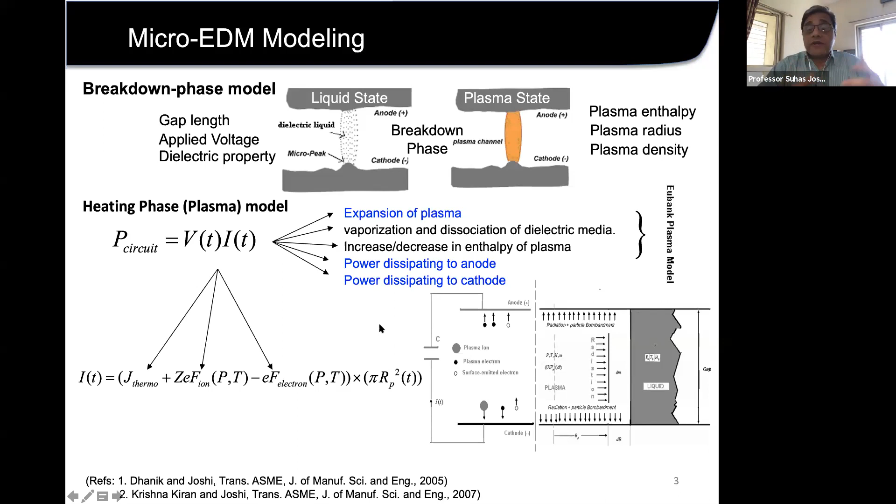So we found that there are certain small differences in the sharing of energy between the anode and cathode, and the power going to the anode versus the cathode. Then we re-evaluated the energy required for generation of the spark.

So these are some of the times in microseconds showing how the plasma is actually forming between the anode and cathode in micro EDM. These were calculated values, but later on Professor Kunieda from Japan actually used these calculated values to verify his experimental values.

He was able to generate a single spark and actually measure the size of the plasma column. We found that our model and the experiments agree well when the total spark energies are lower, but when the spark energies are very high, our model was giving larger results than the experimental results.

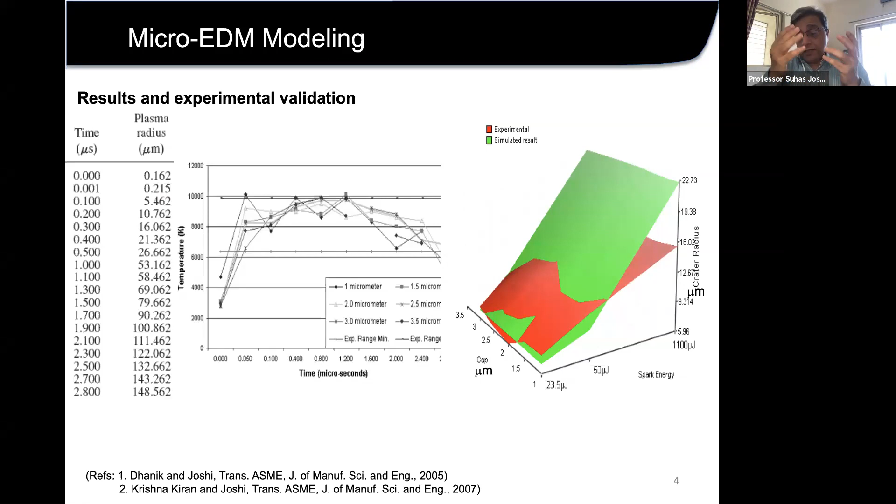That was because we had not considered resolidification of the evaporated material. When the spark forms and a cavity is formed in EDM, after a while there is a certain amount of resolidification of the metallic wafers, and the actual dimension of the crater formed is smaller than what it initially was. So that's where, at larger energies, those differences become much larger.

Similarly, at that time there was no understanding of how deep a hole can be made in the EDM process, and what the shape of the hole is. So we devised a method - I don't say it's a great method, but here's what we did.

We had two very polished surfaces, and we joined those surfaces together firmly. Then we actually made these EDM micro holes in between the two surfaces, which were held together by some kind of vise.

You can see here these are the two surfaces, and this is a very small electrode, about 400 micrometers. We actually machined at the interface of the two surfaces so that you can open them and see how the holes are actually machined.

So that is what you can see - these are the surfaces opened like this. The holes are made like this, and the surfaces are opened and kept like this. This is the top half of the hole, and this is the lower half. So we did a lot of experiments, almost like 20.

This was according to an orthogonal array, about 27 experiments, and in all of them you can see that they are exactly at the center, so the shape of one half is exactly equal to the shape of the other half. We found that a huge length to diameter ratio is possible - about 10 is easily achievable in the micro EDM process.

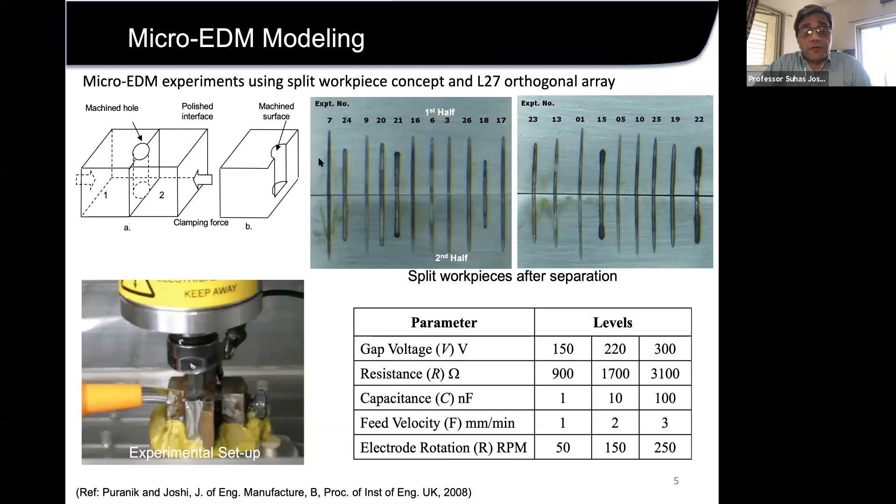Some of the holes which we opened - now we have access to the holes that were machined, and we can do a lot of things. We can do scanning electron microscopy on the surfaces and see what happens.

You can see the entry of the hole here, and this is the end of the hole. The initial hole is very fine, but as you go down you find there are a lot of particles or debris sticking to the surfaces, starting from here to here. This is a further enlarged view.

You can see there is a very nicely dimpled structure on the surfaces, meaning the EDM process is really happening well. But when you go down towards the tip, you find a completely botched up surface, in the sense that sparking and resparking happens repeatedly on this.

This is a very close view of the surface at the entry of the hole. You can see the EDM cavities, or craters, which are actually formed on the surfaces. But towards the middle and end, you find these surfaces get eroded because the debris particles cannot come out from the process - since the hole is very small, debris ejection becomes very difficult.

These particles, when they try to come out, actually get trapped between the electrode and the surface, and they generate different sparks at different places. Yes, we get secondary eroded surfaces, but that secondary erosion is very prominent at the ends of the electrode. Now, towards the tip of the electrode, these debris particles actually eat away the electrode itself because of the sparking process.

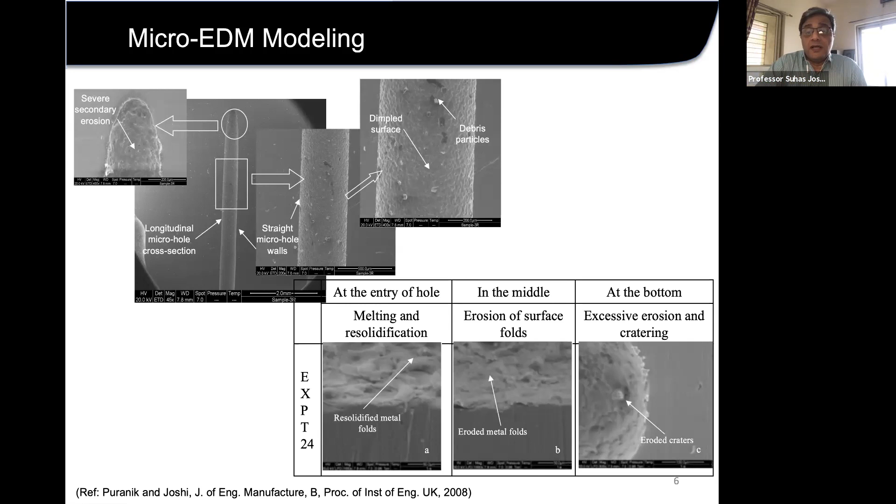We also did a lot of microstructural understanding, like measurement of micro hardnesses in the lateral directions along these holes. We also checked the compositions at various places.

The conclusion is that the hole surfaces are fairly less damaged, I would say. This schematic actually tells you what exactly it is.

If you take a regular EDM process, you will find there is a damaged zone from this point to this point. You have a hard layer, then a soft layer, and then the bulk material. So you have an excessively damaged surface in the EDM process.

But in case of the micro EDM process, we hardly found any kind of white layer. We found just a small reduction in the hardness near the hole wall. So if this is the wall of the hole, there is a small reduction in hardness.

We took machining parameters which required each hole's machining time to be very large, and that was sometimes criticized—people said, okay, you used more time, so you got no white layers, and we got only a small annealed zone around the holes.

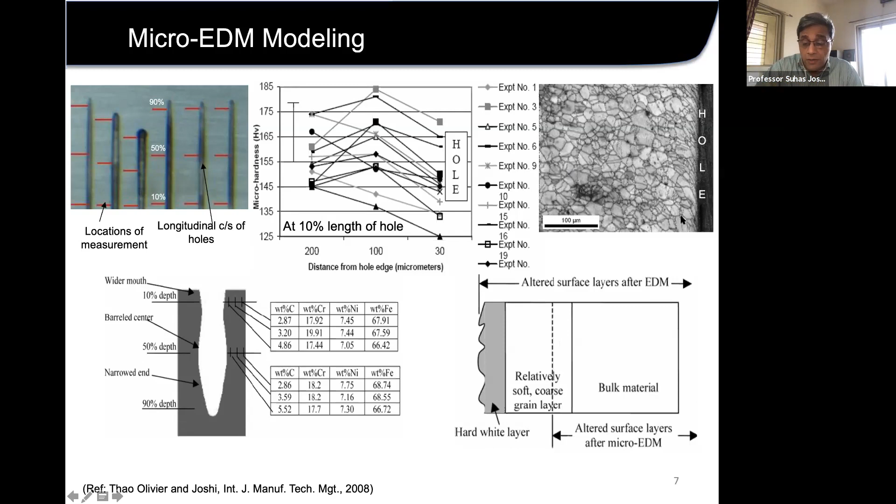During this experimentation, by then we had those small machines for performing EDM operations. We also went on to do modeling of the wire EDM process. So now, instead of a single spark, we modeled a series of sparks around a wire. If that happens, what is the material removal rate, and so on and so forth.

So this is the model of the wire EDM process, and it was also published in one of the early journals at that time.

One important aspect here is how you graduate from a single spark model. We initially had a single spark model which talks about only a single cavity. How do you take those cavities and multiply them on the surface? When you multiply it, is every spark having equal energy? Where is every spark going to be positioned? What is the spatial distribution of the sparks? All those things come into picture. So from single spark to multi-spark, it's a big process.

Even now, last month, one of my students finished a PhD in EDM, and he developed a model of multi-sparks happening on the surfaces at random time durations and at locations where the interelectrode gaps are smaller.

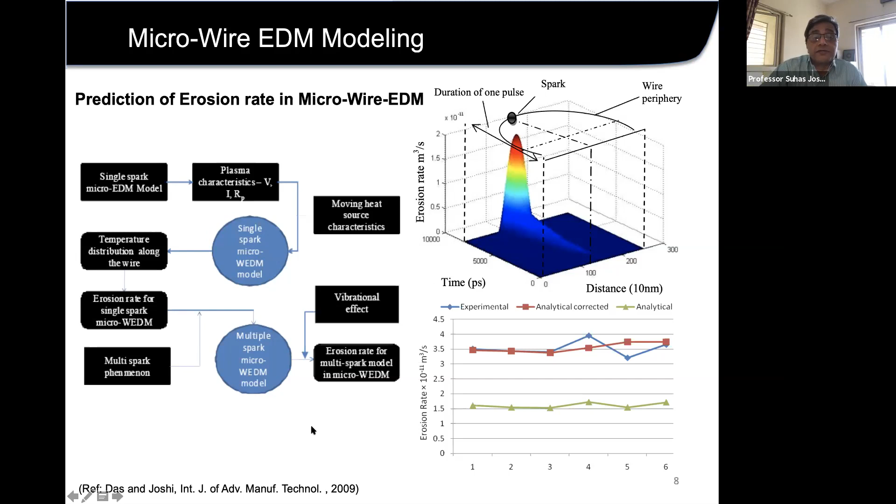At that time, another important process being considered for micro machining was micro electrochemical grinding. This is also a very interesting process, and primarily it is used for very fine applications like dental implants.

The process is something like this: there is a grinding wheel, which is a conducting kind of grinding wheel, and there is electrolyte flow which generates a hydroxide layer on the surface. This is an insulating kind of layer, and the abrasive particles actually abrade that insulating layer during the grinding process and expose the new surface to the flow of electrolytes so that the electrolysis process can happen.

We also find that in this process, the gap being very small and the flow velocities of the surfaces being very large, some kind of turbulence is created, which generates a layer on the surfaces and basically generates shearing stresses on the surface. This helps remove the oxide hydroxide layer formed and expose the new surface.

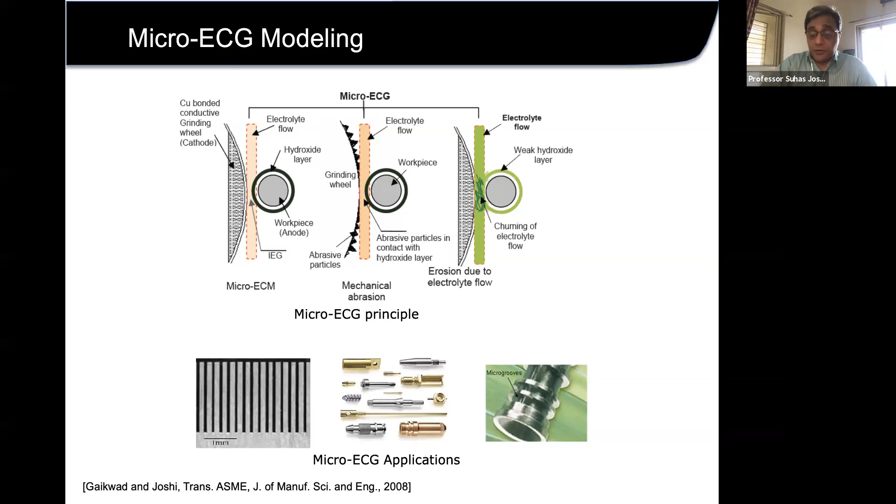So we ended up developing a small setup. This is a grinding wheel enclosed inside, and this is a workpiece with a small projection. You can see the grinding wheel here, and there's a small rectangular cavity through which you can pass the work surface, and then the grinding will happen. Because this electrolyte is corrosive, it's very difficult to manage - otherwise the entire setup will get corroded. This is an interesting process where, using this, we could develop small grooves on the surfaces.

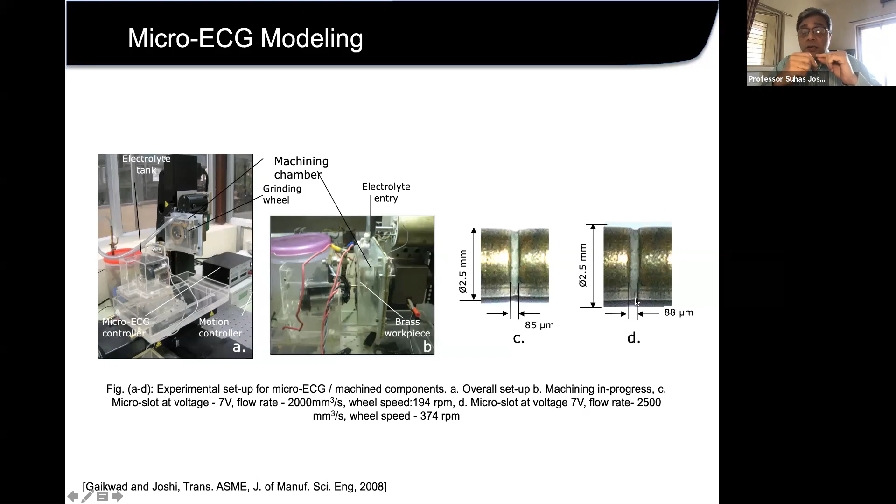At the same time, we modeled the very small interelectrode gap - what happens in this gap, what are the velocities at the two boundaries, and how much stress these boundaries apply on the surfaces. So this was another effort which we did.

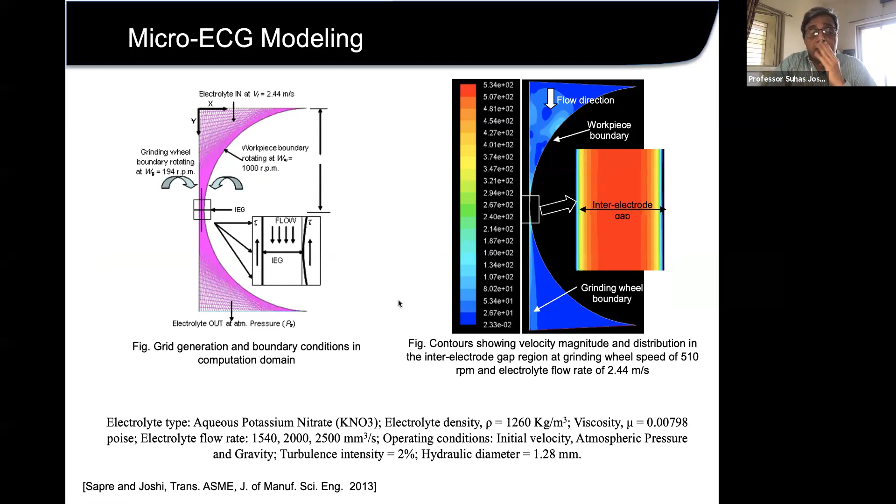You can see this is velocity versus distance across the interelectrode gap. The velocities are higher towards the wheel, and on the workpiece side also the velocities are higher, creating shearing stresses. This is the magnitude of the shearing stresses, which is maximum at 90 degrees.

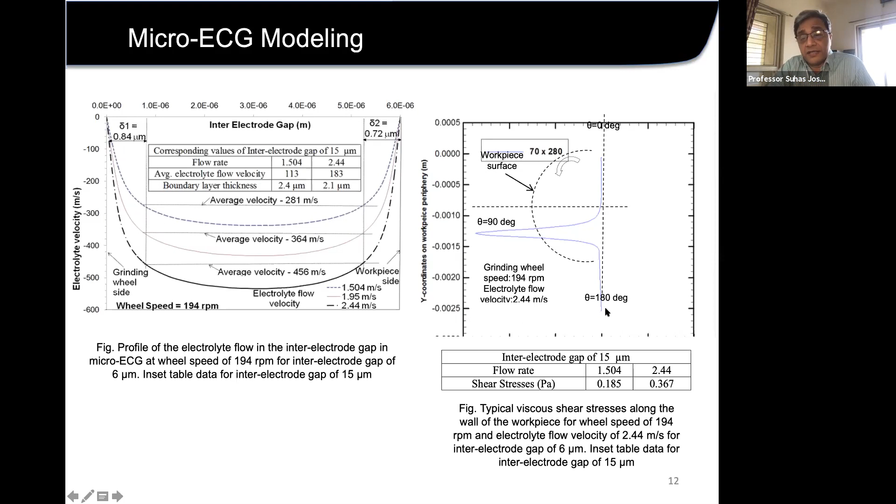Another thing we did was, at that time very small mini dynamometers came into the market. They were very costly, but we were fortunate to be able to buy them through some funding. We tried to measure the forces coming on during the grinding process, and calculate the shearing forces through the measured shear stresses applied in this region and the downward forces measured using the dynamometers. We got a reasonable approval, but not that accurate - though the forces and shearing stresses came out in a similar range.

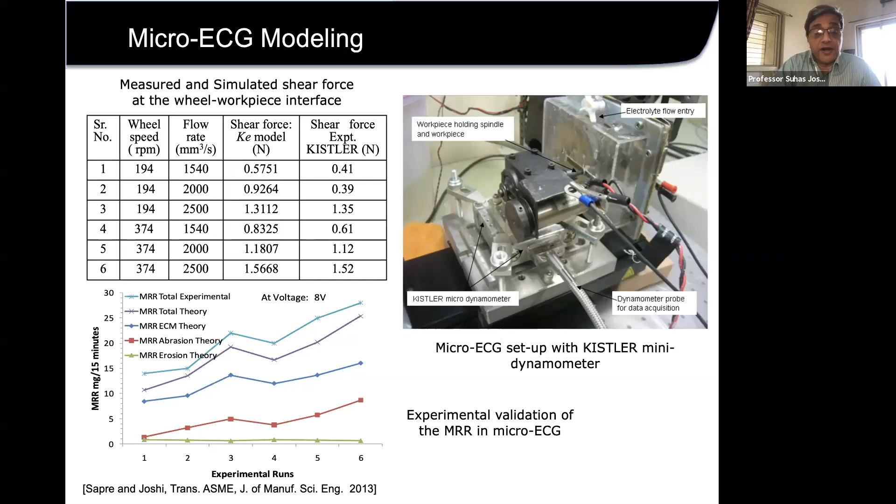Similarly, apart from these processes, micro laser was becoming another important tool at that time. Some students were working on laser manufacturing also. We had a laser system available - I'm not sure whether this will work, but it may work.

What it does is we focus the laser on a mask, and the mask has all kinds of holes, whatever we want, and the beam passes through the mask. Now the laser beam has several small beams. The image of the beam can be reduced in size, and after reducing in size, it can be incident on a workpiece surface.

So now I can have a mask with 100 holes, and the mask can be larger, but those 100 holes' image can now be reduced. And then I can put it on a surface - this is one image. At that point, I do some pulsing, then go to the next stage, somewhere here, or here, in a 3 to 4 millimeter space. It's a very small space because I can now reduce the image, make it very small. If I have 100 micron holes on the mask, I can make those holes 25 micron, or 15 micrometers, if I have a 1/5 or 1/8 or 1/4 reduction in the optical reduction. And then your mask making becomes simpler because I can make the mask bigger, and reduce the image of the mask to a smaller extent.

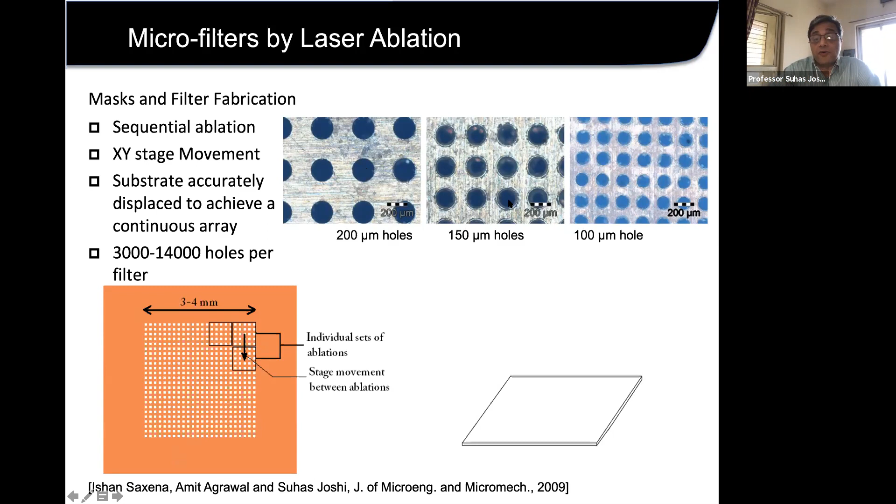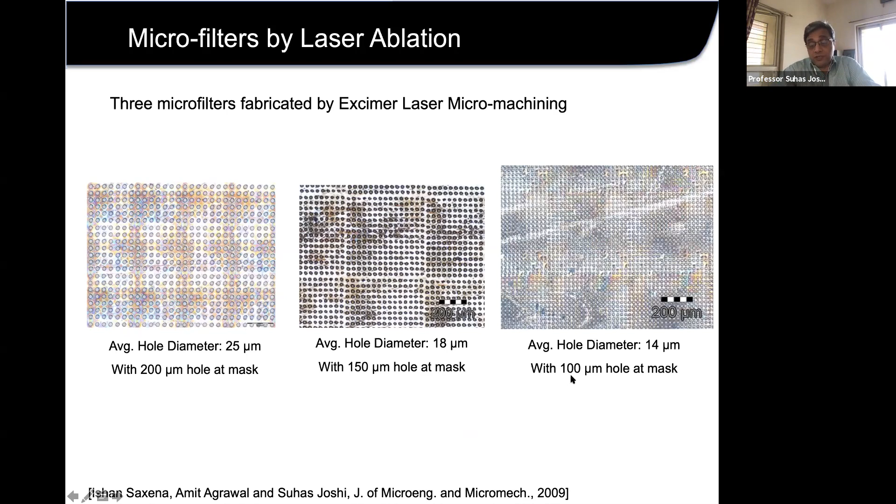And so now I can take this, go to one position, move the table, and perforate the whole surface. It was again a very tedious process, but we could make the mask with 200 micrometer holes, 150 micrometers, and 100 micrometers, and then we could actually make the polymeric surfaces, what we call the filters, microfilters, with some kind of spacing - 25 micrometers, 18 micrometers, and 14 micrometers. So very, very small. A 14 micrometer hole is very small, and we could make it using a 100 micrometer mask because that reduction in the beams was possible. So you can see that even 25 micrometer holes are fairly small, fairly uniform in size. So the smallest holes we could make here.

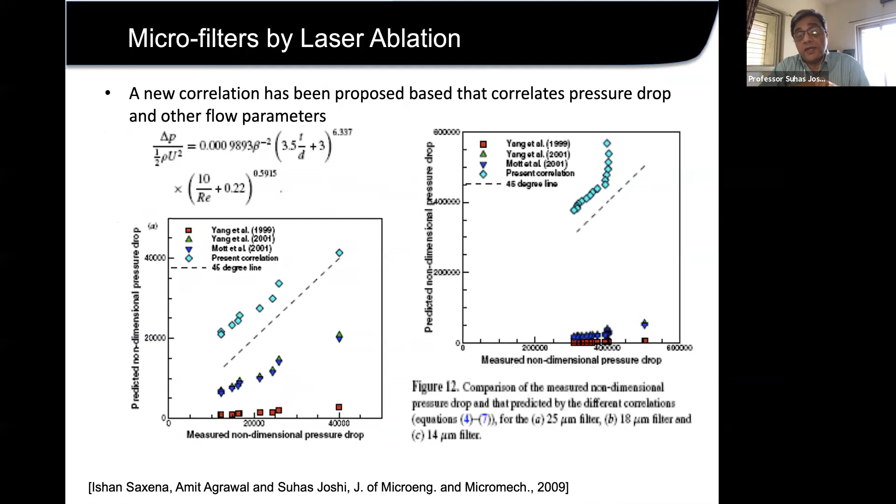And then we could make, with the help of this, it can be put into a device, and you can measure the pressure drop across the microfilters. One of my colleagues, Amit Agrawal, was involved from that point of view in this particular work. And we had certain results - what is the pressure drop across the microfilters - and we could get fairly reasonable results at that point. Okay, I think I dropped a slide, but fine. So we could get some kind of reasonable estimate of the pressure drop across such filters.

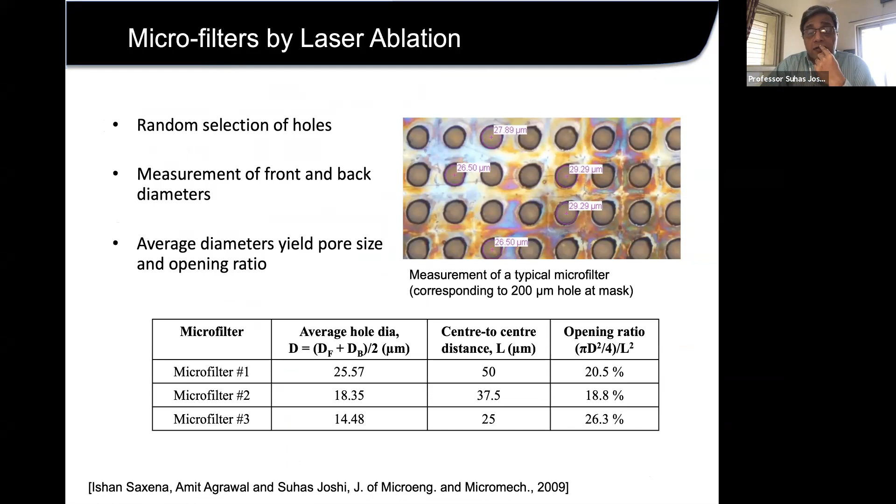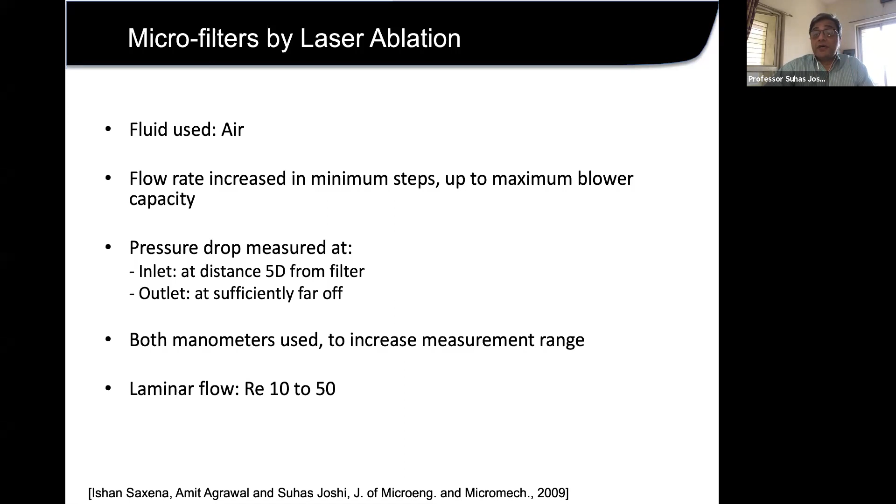But we could make - I'm not able to get the exact number - I think 16,000 holes were made in a 3 to 4 mm size. We made about 16,000 holes in that small size using the lasers. So of course it was a polymeric plate.

Also, similarly, the efforts at that time were towards helping hold micro objects. So can we have some micro grippers to hold the micro objects? And that's where another dimension, another set of people, were working on how do we design micro grippers which can give you very small force, applying very small force on micro components, so that the components do not break.

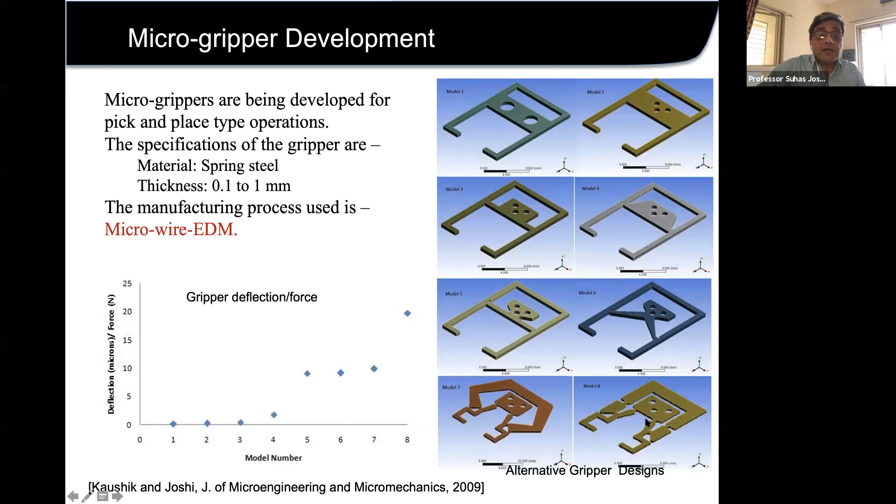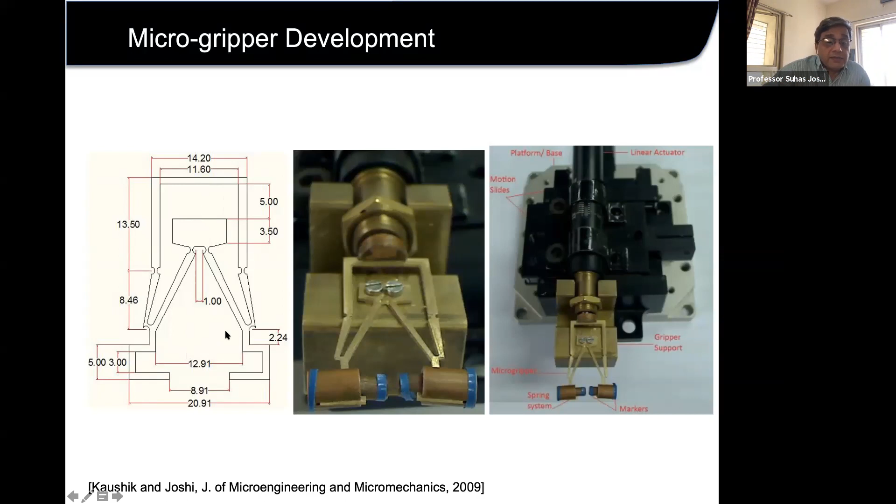So after a lot of iterations, we have these kinds of joints, and we designed this kind of a gripper - a planar gripper. This was actually something like this: if you apply a force here, then these grippers close. So if you apply a force from the backward end, the grippers actually close. Though this looks like a very elementary structure, it's very interesting, because this whole gripper was manufactured, and then these two pipes were introduced - these pipes are nothing but like small cardboard pipes. The whole gripper is not more than 50 millimeters by 20 millimeters. So it's even smaller than that - I'm kind of forgetting, but yeah, even smaller than that.

So the interesting result is here: the two concentric cylinders, one has a spring inside. So what we can do now is that when the jaws come inside, they only apply a force enough for holding that particular object - suppose you have a hair, or nail, or a simple glass plate in it - and only that much force is applied. It doesn't apply more force, because now you have a spring between the two concentric cylinders, and that spring is pre-calibrated. So these blue dots are nothing but the markers - these are bands which can be visible from the top camera. And now you can see the displacement of the springs and calculate the force it is applying to hold a hair, a thread, a nail, or a glass plate.

You can see now that the force required for holding is 43 millinewton, 62, 102, and 159 kind of. So it applies only the force which is required for that particular object and not more than that.

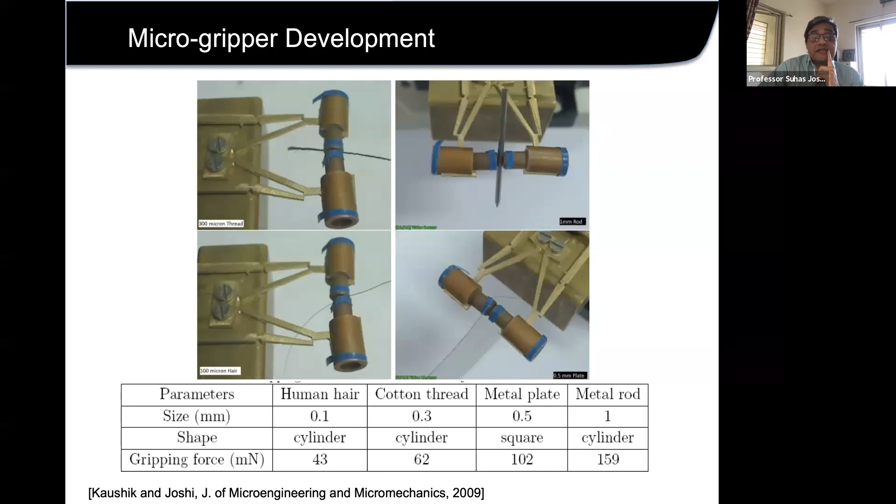Parallelly, we were also doing a lot of collaboration with Bhabha Atomic Research Center, and a lot of components we were manufacturing, that was going on up to 2015 or so.

These are some of the components, like this nano delivery pin, where a 40 micrometer slot is carved inside a pin, so that when the pin goes into DNA liquid, by capillary action it absorbs a small amount of liquid. And when it touches the nascent surface, it releases a small fraction of that, a nanoliter or so.

There are many ways by which we actually fabricated these pins. These are micro exchanger plates, actually 100 micrometer thick foil. Out of that, 40 micrometers we removed, and 60 micrometer we removed, and kept 40 micrometer over there, so that these act as coolant passages.

So these grooves, though they look pretty dirty, are like 60 micrometer deep, and a small cutter was actually designed to make these grooves, a peripheral milling cutter.

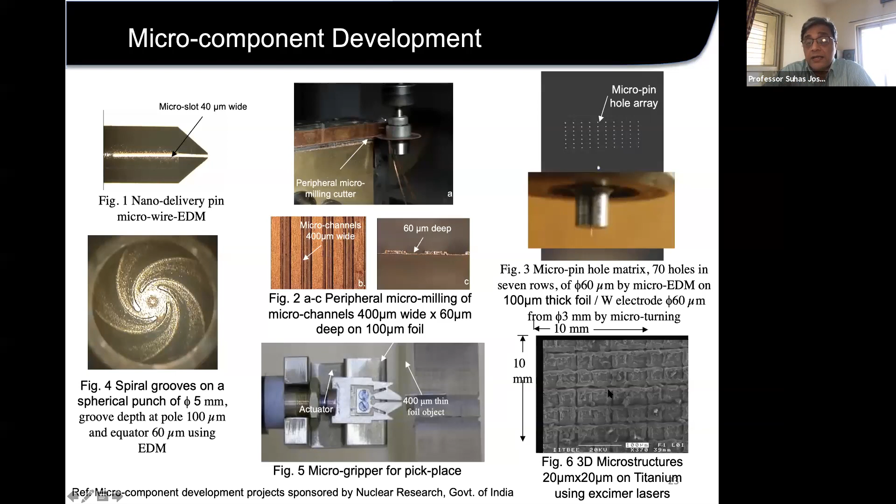These are very fine kind of grooves made by the EDM process to give a differential pressure. These are spiral grooves, and when they rotate, they create a differential pressure across these grooves. These are some of the initial textured surfaces made by lasers, but we did a lot of things later on.

So from here, we have been doing different work, but this is some textured surface manufacturing using EDM, using micro machining processes.

These are some textures which are there on the wings of cicada, like sharp peaks on the surfaces. When bacteria fall on it, the bacteria actually pierce on them and die. Whereas here, these are globular kind of structures, multi-scale structures, like smaller globules but larger globules at the bottom, and smaller ones on the hairs on top of it, like multi-scale structures.

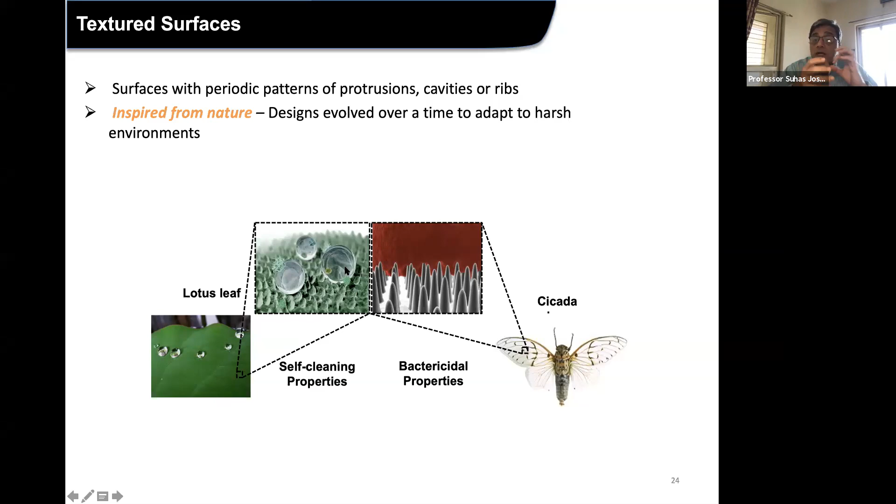Which are good for self-cleaning kind of properties.

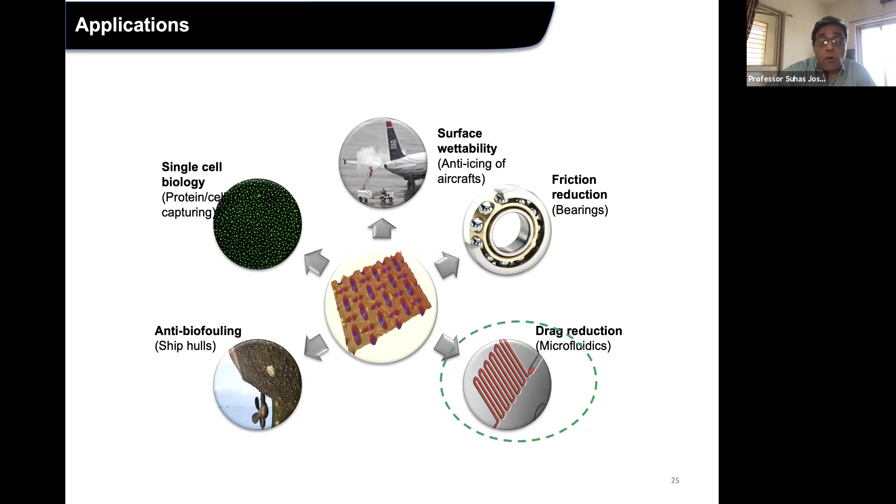Variety of structures are required for variety of places, in bearing industries, drag reduction, anti-fouling, protein biology, or anti-icing on the wings of aircraft. So some kind of structures are required such that ice flakes do not stick to the surfaces of the wings and just fly off from their positions. Otherwise, the ice falling on the wings of a parked aircraft causes a lot of increase in load. So these are some of the examples.

Going in that particular direction, we have developed another process which is called reverse micro-EDM. What is done here is that, we know in the EDM process, we actually use electrodes and make holes on the surfaces. But in reverse EDM, what we do is we take a plain electrode, a plain workpiece, and take an electrode which has holes, and we try to penetrate the electrode inside the workpiece.

So you can get these kinds of projections on this. This is a simple perforated plate which is having some holes. Now no EDM action occurs on this side; EDM action only occurs here, here, and these corners. So after some time, you can make these kinds of rods on it. We were initially thrilled to get such kind of very fine rods.

But later on, we did some organized experiments and we found that yes, rods of various sizes can be made, and if the holes can be of any shape, you can have the rods of that particular shape.

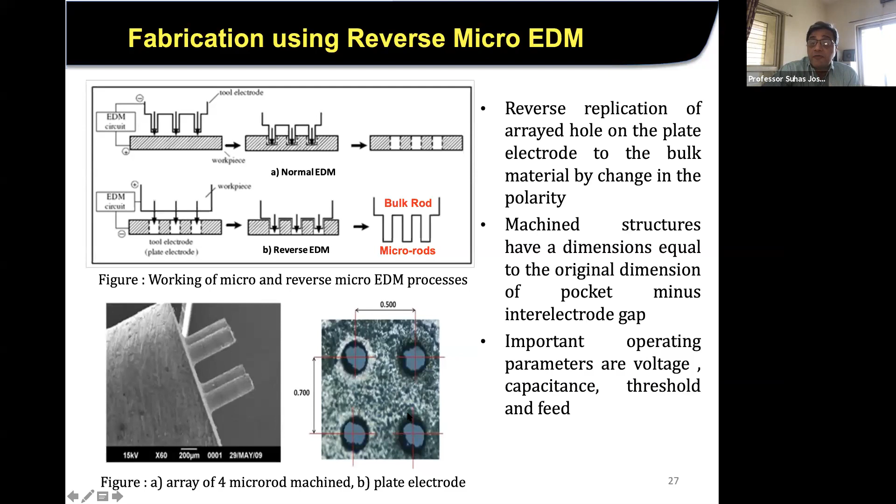After the initial experimental setup, we did another addition here. We found that during the electrode up and down process, the debris which accumulates around the holes sticks to the rods and keeps eroding them.

So the rods formed in softer metals are not very straight, and have a lot of constrictions and uneven surfaces. So we came up with the idea of providing some vibration motion to the table itself, so these debris particles get away from the whole process.

The situation is something like this, with these holes being very, very small. What we did is put an electromagnetic actuator at the bottom of the table itself, and gave very low frequency vibrations to the table, which has helped release the debris particles getting entrapped between the holes.

And now we could make very long rods, without much wear on the electrode also. Sometimes what happens is that the electrode holes get worn out and become larger, so that's another problem.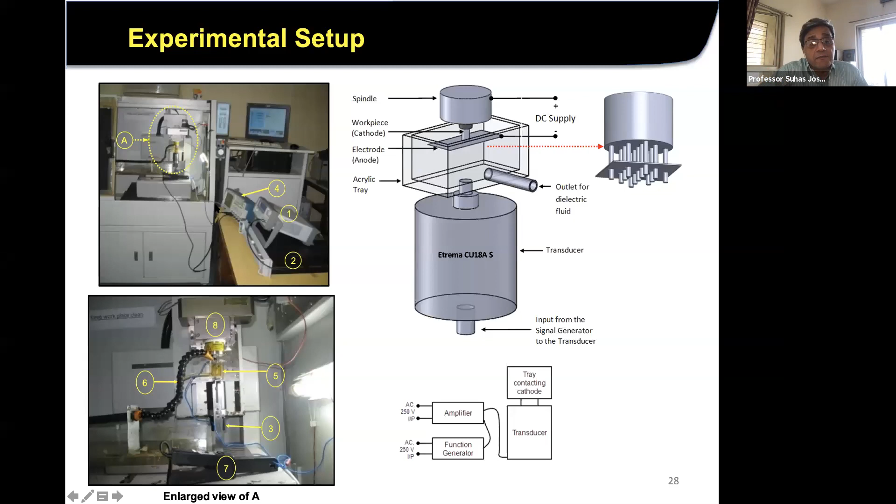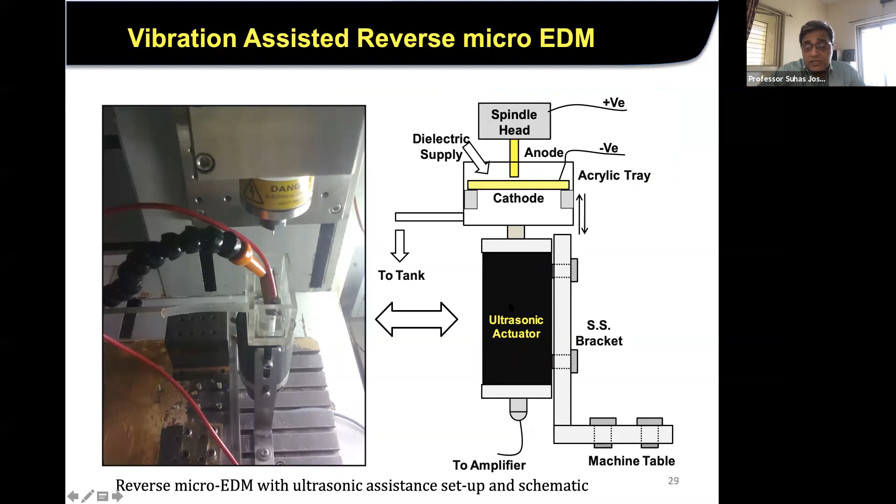This is another experimental setup done by my PhD student, for making rods of very large sizes. You can see here an ultrasonic actuator, but actually these frequencies are lower, and with the help of this actuator we could make a lot of difference in creating a variety of structures.

For example, this is an 8 millimeter diameter titanium rod, and you can see these kinds of structures formed from here to here. Of course these are orderly structures, but the process has a lot of capabilities.

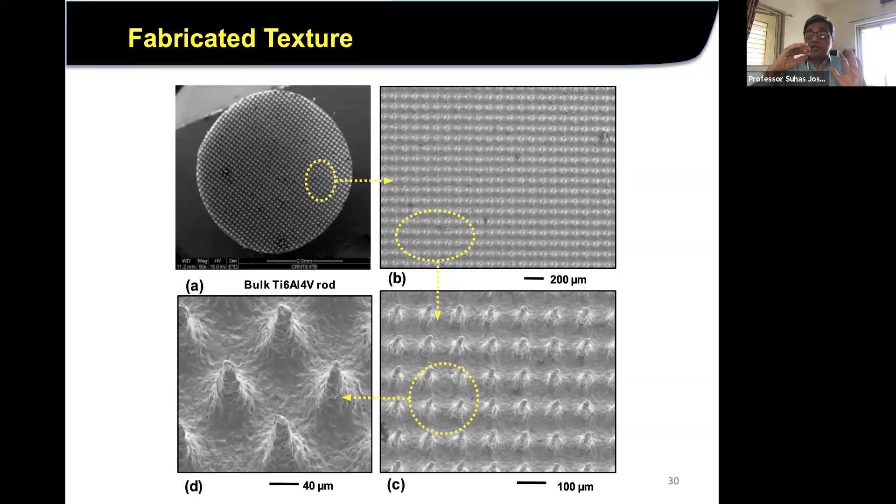We have later explored it for uneven surfaces and very flexible electrodes. As long as they don't contact the surfaces and short circuit, this process can work. We could get this rod which has these kinds of projections.

The pillar heights are about 170 microns, width 25 microns, and gap between them 75 microns, so they are fairly close together. Of course, this depends on how well you can make the holes in the electrode itself.

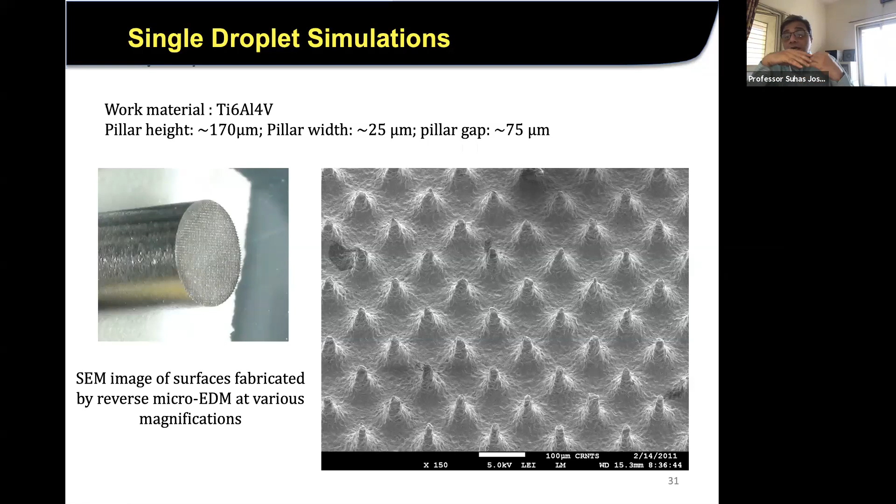So we did contact angle measurement here. On a flat surface, the droplet flies off and is flat, whereas on this surface, the droplet sits with a high contact angle of about 114 degrees, compared to 52 on the flat surface.

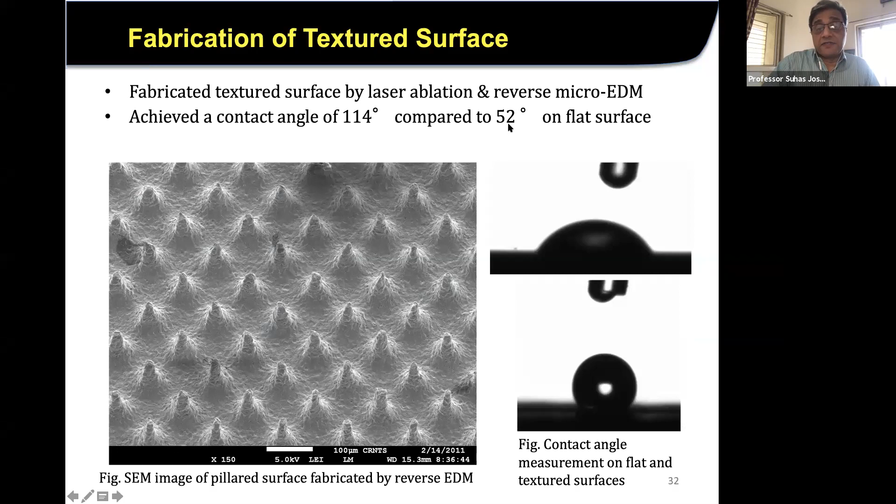This is again another exploration - the first one was where somebody wanted to know if this could be done by laser. This is the enlarged view of laser - one line of laser, and this is another line of laser, and this is the pillar which is formed.

Each pillar formed here is nothing but these - these are the pillars, and you have laser lines from one side to the other. These are very early experiments, but these globules of material on the pillars were actually helpful.

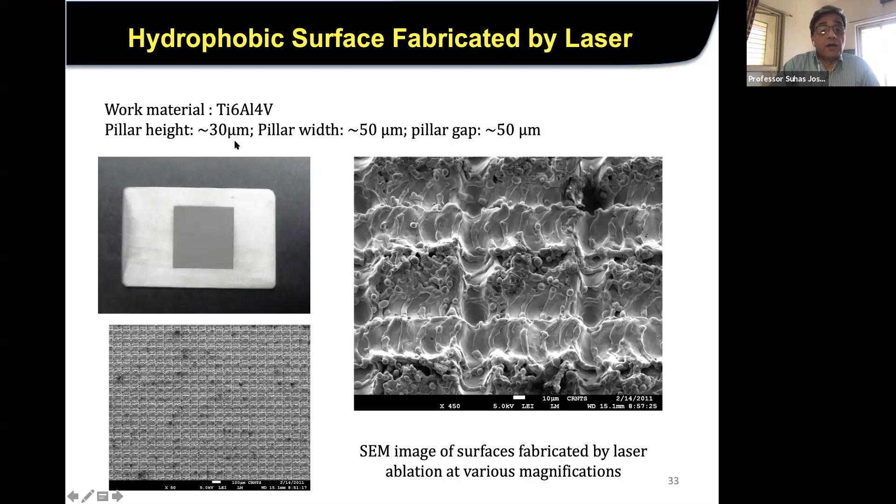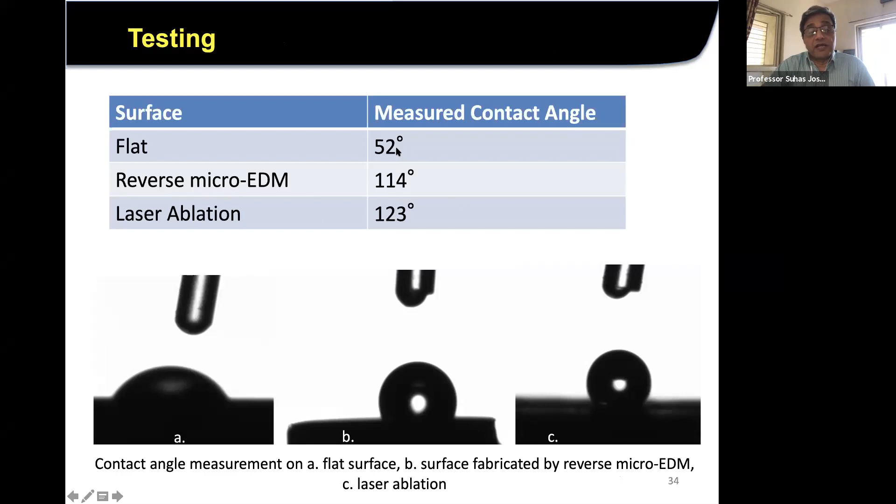The contact angle was 123 degrees here in case of the laser surface. In the EDM surface it is 114, and on the flat surface it is 52 degrees.

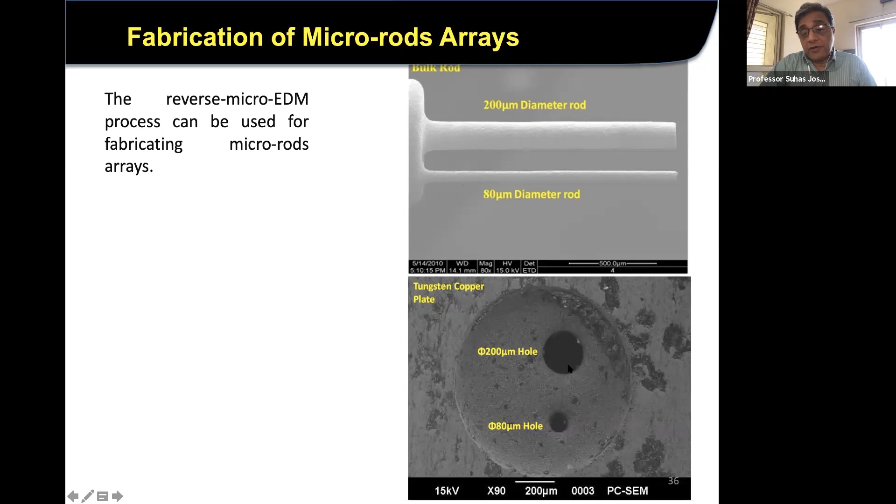So then again, we continued and tried to explore the longest lengths and straight dimensions we could make using the EDM process. These are some of the fine rods we could get on this tungsten copper plate - 80 micrometer and 200 micrometer, very high aspect ratio structures.

These are again some examples of very high aspect ratio structures. The smallest rod we could get is using a 25 micrometer size hole, giving about 744 micrometer length, so it's a very high aspect ratio.

But you can see that the rods behind don't survive the whole process - only one of the 4 rods actually survived. Because, as I said, small debris particles actually eat away the work material itself.

This is another example of using lithography for etching, where we made 4 different kinds of textures in 4 different quadrants of a silicon wafer, and then put PDMS on it so fluid can pass on one side and be taken out on the other, with the structures at the bottom of these microchannels. This sample shows microchannels built at various places on a silicon wafer, with inlet and outlet tubes.

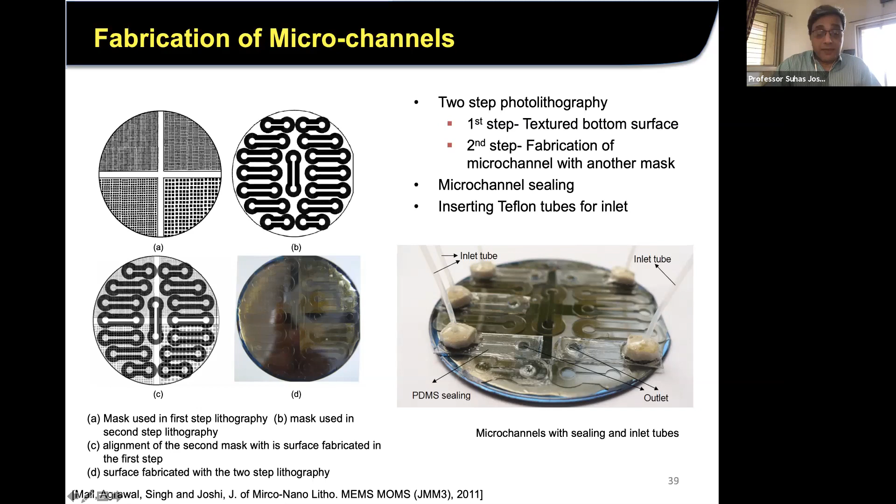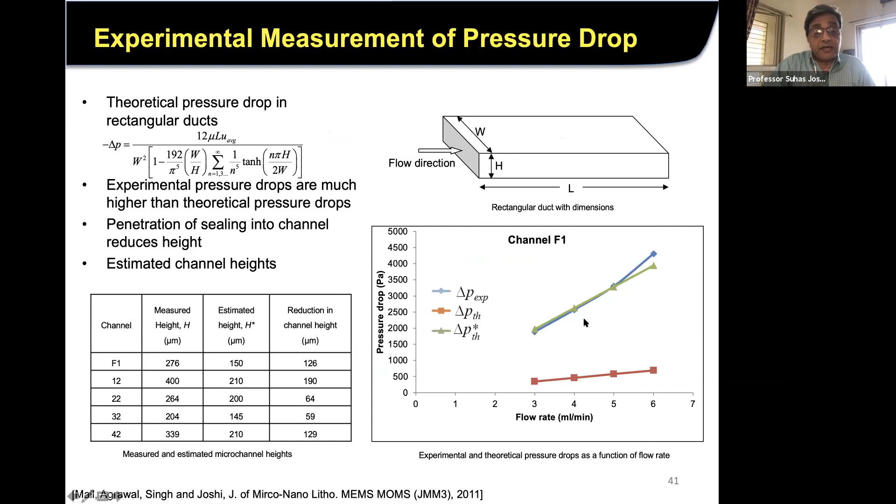This is the experimental setup. Again, my good friend Professor Amit Agrawal is part of this work, whenever fluidics comes into picture. We measured the pressure drops and got reasonable agreement with the measurements. This work became a cover page article in the Journal of Micro Nano Lithography, MEMS and MOMS.

More recently, we have been working on texturing of cutting tools. These are diagrams of the textures made - dimple-like textures and grooves on the surfaces. During the cutting operation, when the chip flows on the face of the tool, there are two different zones: sticking and sliding, with very different pressure and velocity conditions, so you cannot use a single kind of texture in both zones. We experimented with different textures - longer grooves in the sticking zone on the tool, and dimples in the sliding zone.

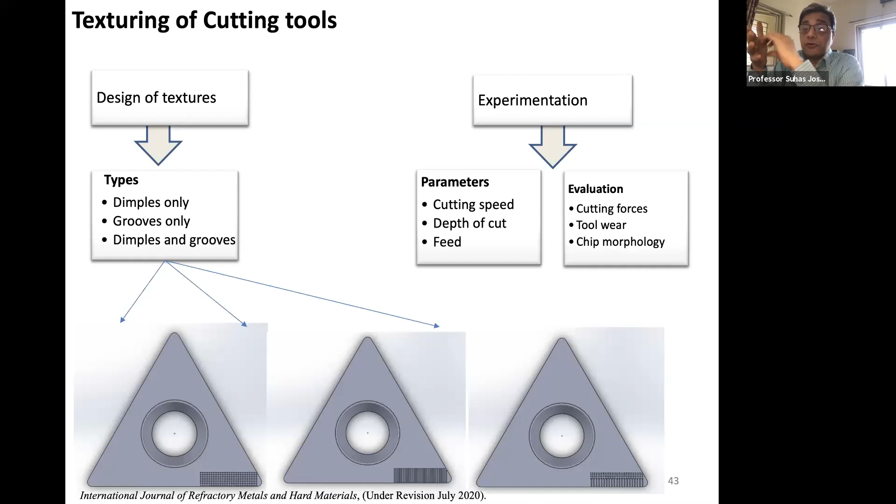Am I audible, or did I get momentarily disconnected? Yes sir, yes sir, no we can hear you. I'm audible, right? Yeah, now we are, no problem, we can hear you. Because I think Suhas, no problem. Okay, so I'll continue.

The chips also show a very interesting pattern when we use textured surfaces. Initially we had heavy segmentations under very high feeds, and those heavy segmentations reduce significantly, to some extent becoming sort of a continuous kind of chip. These are the back surfaces and these are the side surfaces of the chips. The back surface is very...

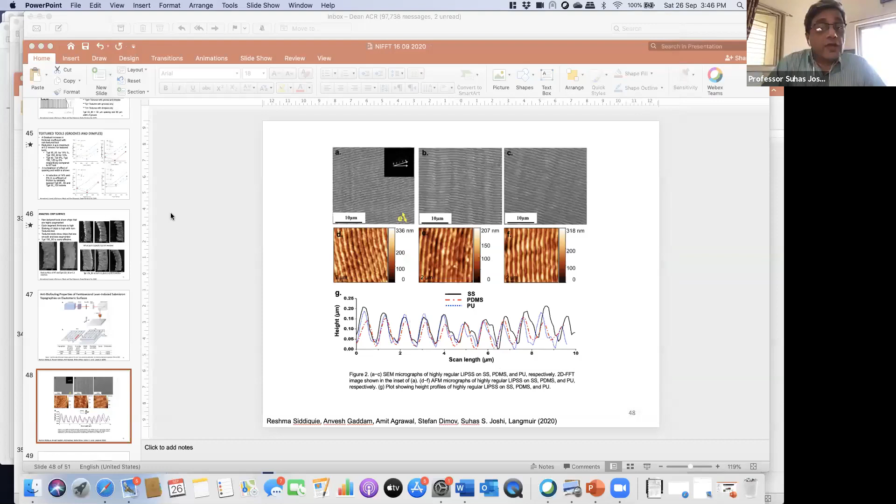We are able to view your slides. Are you sharing the slides? Yes, I am sharing the slides. Okay, maybe because of disconnection, I'll do that once more. Okay, sharing screen has gone, I think. Yes sir, it is clear now. Okay fine, I think from here we lost the connection, I believe.

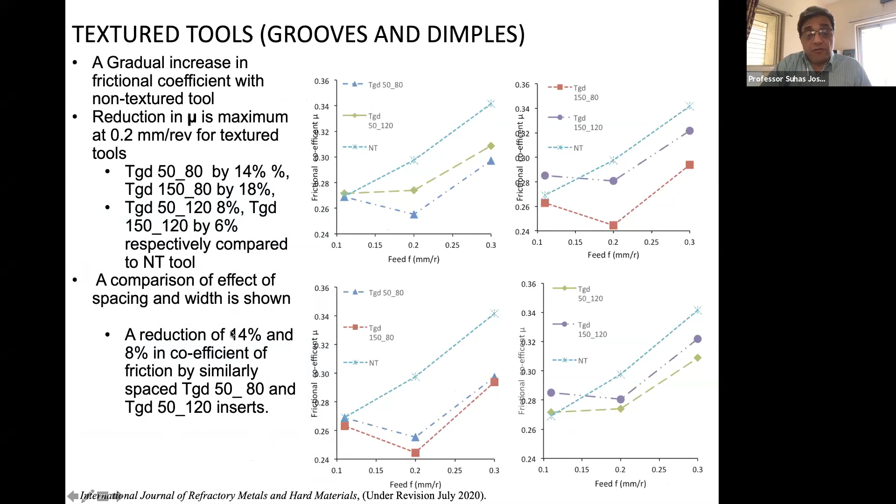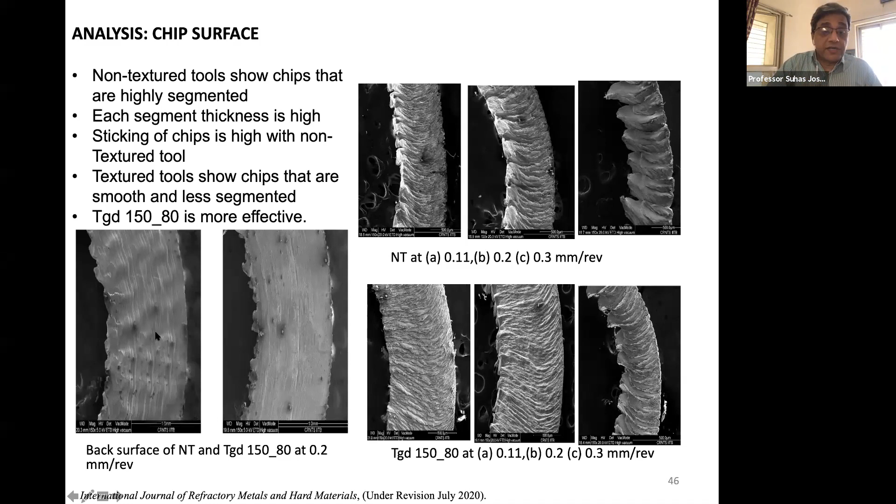We got a lot of advantage by providing these grooves on the surfaces - friction coefficients and cutting forces all reduced by about 6 to 18% using the textured tools. Also, the chips were highly segmented without the textures, but with textures the segmentation becomes very small, less prominent, and they almost look like continuous chips. The back surfaces of the chip are also smoother when textured tools are used compared to non-textured ones.

This is very recent work done partly at our place and partly at University of Birmingham. Here we are going from micro texturing to nano texturing. We use femtosecond lasers to provide patterns on the surfaces - zigzag patterns and overlapping patterns - to get laser-induced periodic surface structures and multi-scale surfaces.

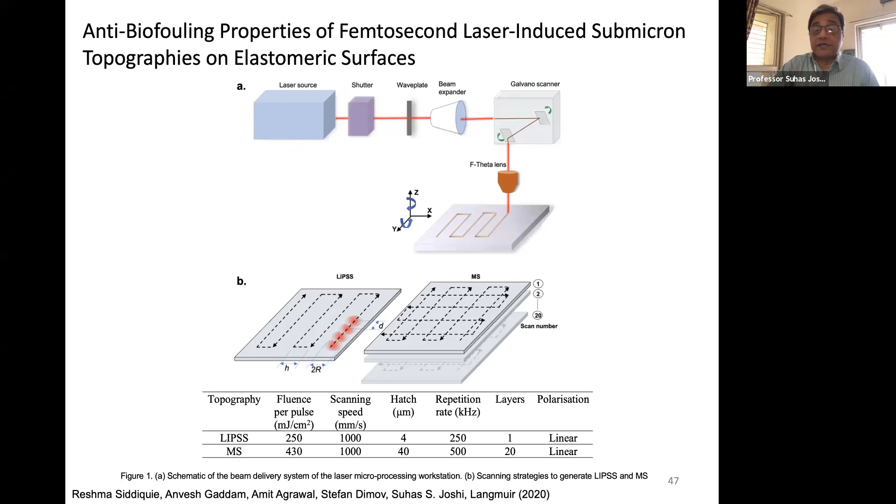Once you move the laser on the surface, you get certain nanometric features. But when you overlap the laser beams once, twice, thrice or four times, you get surfaces where the main features are microscopic, and on those main features there are nanoscopic surface features - we call these multi-scale surfaces. These are the LIPSS surfaces - laser-induced periodic surface structures, called LIPSS.

These are made on stainless steel, and then they are replicated on the polymers, and on those surfaces you can do a lot of testing on the replicated surfaces. Their sizes are pretty small.

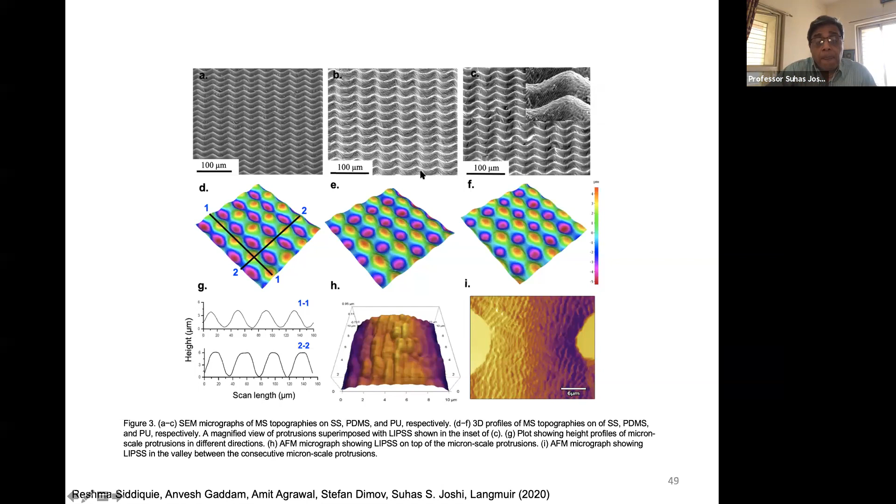Then here, these are like multi-scale surfaces. For example, you have these kinds of scales on the surfaces, and on top of it there are again scales on the micro scale, nanoscopic scales. So these have one shape, and on top of it there's another superimposed shape. These are recently done, all sort of nanoscopic kind of surfaces.

So some kind of bacterial test, and how the bacteria remain on the surfaces, or they get washed away during the process, that is actually tested here - the LIPSS kind of surfaces, and multi-scale surfaces.

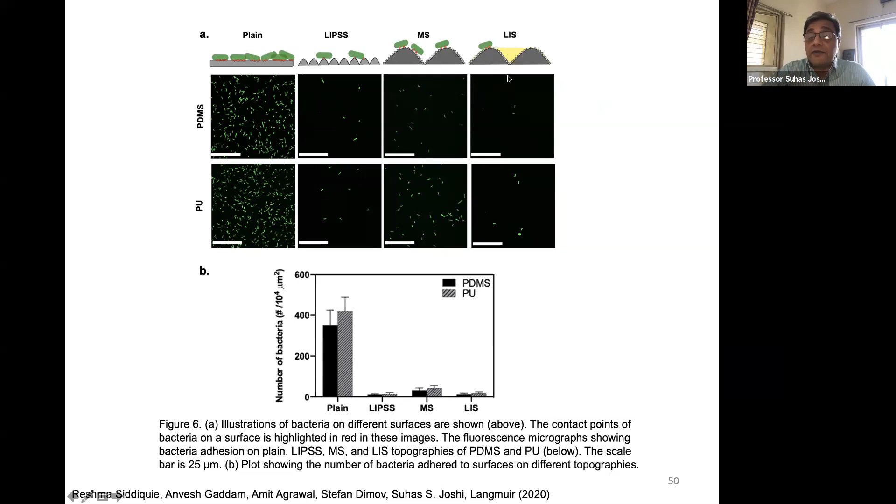And then we induce some kind of fluids in between the surfaces, so that the drag on the surface or the anti-fouling properties of the surfaces improve further. Using some kind of fluids inside these cavities improves their anti-fouling nature.

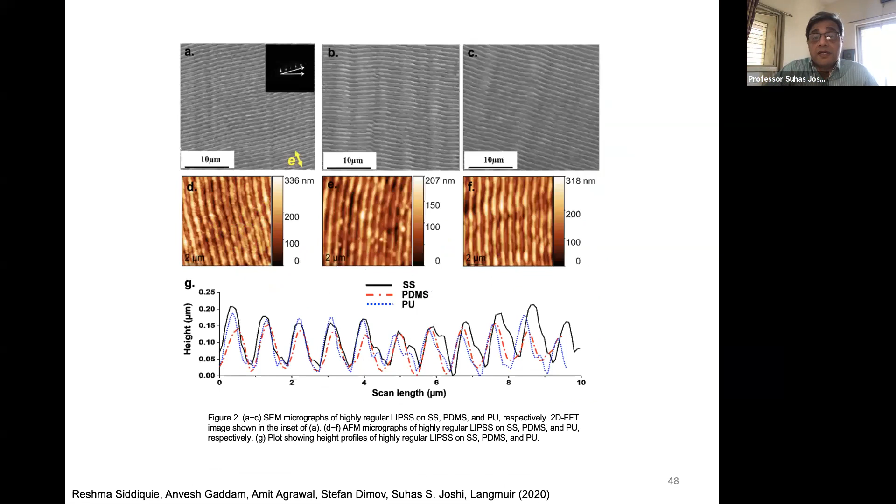So I will stop here. I hope I am in time, and I'll stop at this point, and take questions for the discussion.

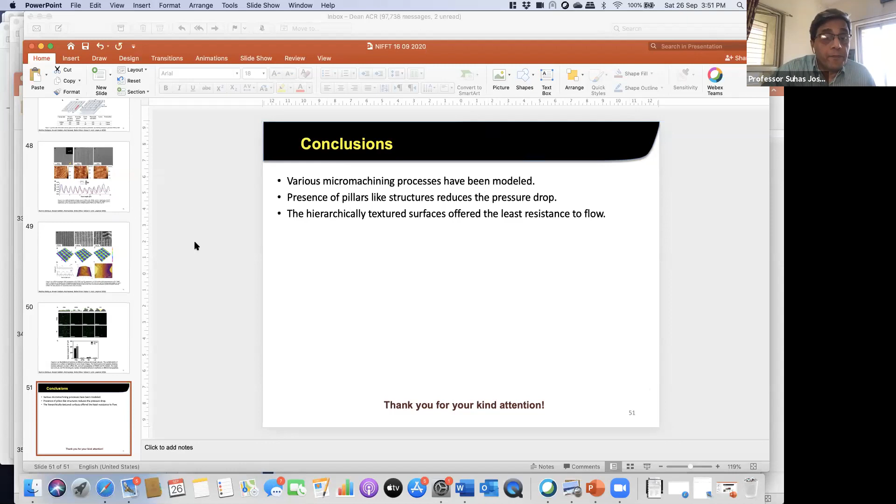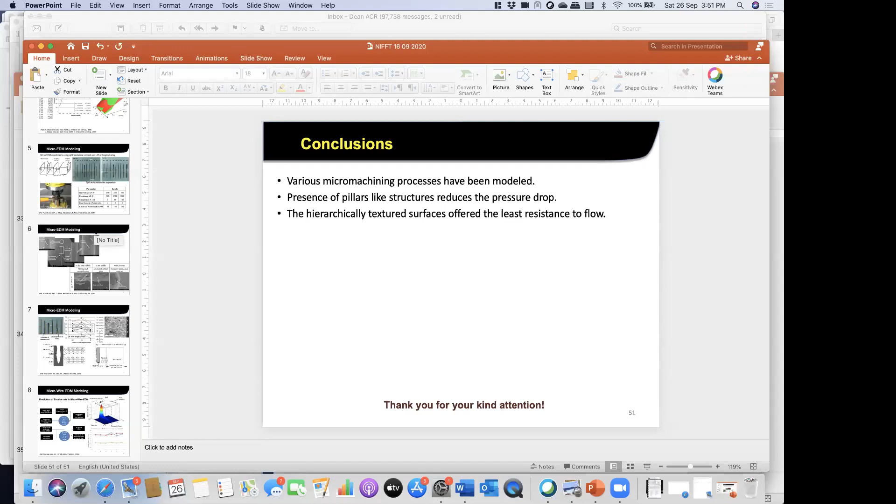Okay, what is the accuracy of EDM? The erosion rate for calculating EDM time, for tool costing and planning, estimating machining time. So that is a question - what is the accuracy of EDM? Erosion rate for calculating EDM time, tool costing and planning, estimating machining time.

If you look at these kinds of holes which are made, these are like experimental things, and at the lower parametric levels, they took anything between 6 hours to a couple of hours. At some places it's a couple of hours, but right now these are kind of 8-10 years old experiments. We now have much better EDM operations, so we have much faster micro machining rates comparatively now. I won't be able to give exact figures, but I think they are easily available in various literature.

But if you are talking based on this, then these are very early results in the micro machining domain. Accuracies are pretty good now - I think we can say that 1 micron in micro EDM, 1 micron and lower accuracies are possible now. Here I have not presented the exact dimensions, but about 20 micron accuracies were achieved, and later on I think we improved the accuracies. Now about 1 micron and half micron can definitely be achieved in the micro EDM process.

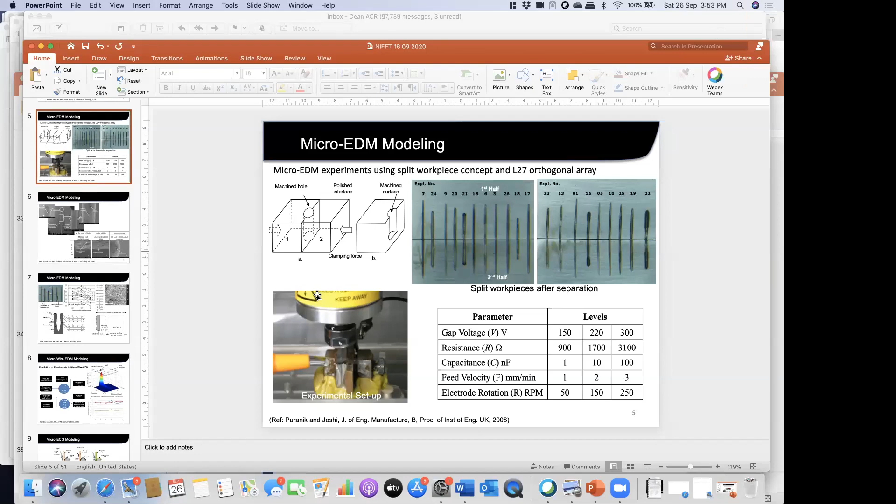Sure, yeah, actually I have something to do from the metrology side. Sir, you did not talk anything about the geometry of these features that you have made. Geometry of? The surfaces, the whole features, the geometry part - yeah, you did not deal with that. And actually, with the textured surfaces, the finish was not talked about.

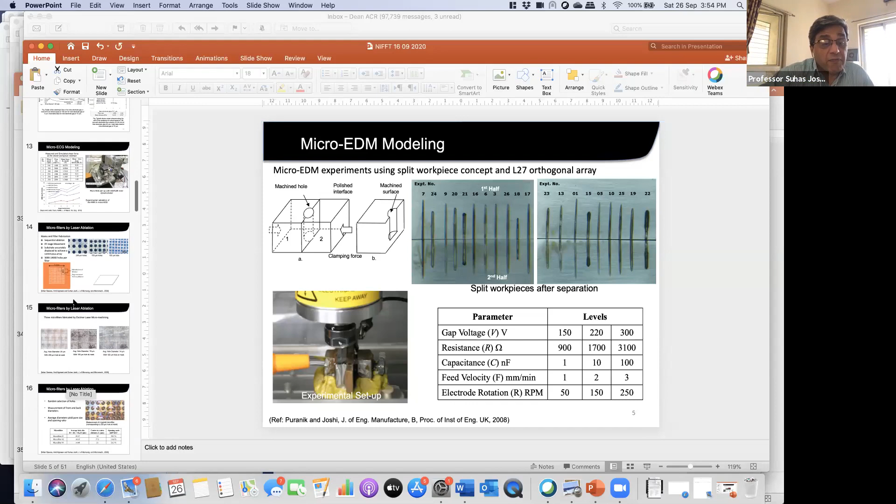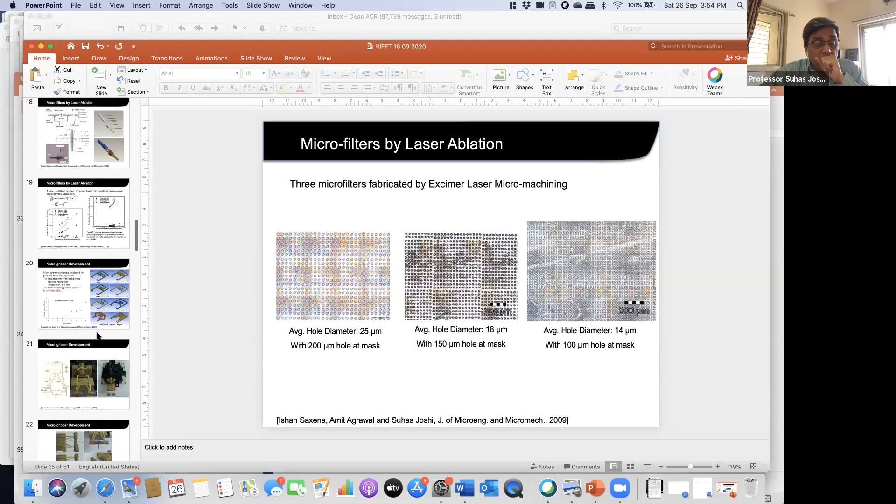In that 3 to 4 millimeter size microfilter which is there, suppose if you take here, the sizes are like 40 micrometer size, and over the entire length of say 10 millimeters, 40 micrometer size over that length. Here the width of the cutter is 400 micrometers, and 60 micrometer depth.

This dimension is something like a 60 micrometer rod made from a 3 millimeter rod initially by turning. And then we use in situ to make these holes, 70 holes of 60 micrometers, using the EDM process to make all those 70 holes. And what we say is that the difference in the first hole and the 70th hole should not be more than 1 micrometer. So diameter should be 60 micrometer, and the first and last hole should not have circularity error more than 1 micrometer.

So that means when you make the first hole to the 70th hole, your electrode wear should be almost zero, or not more than half a micron. So you have to optimize the EDM conditions. Once you make this small electrode of 60 micrometers, you have to optimize the process parameters, making them gentler so that from the first hole to the 70th hole, the error in dimension should not be there. It should remain almost the same.

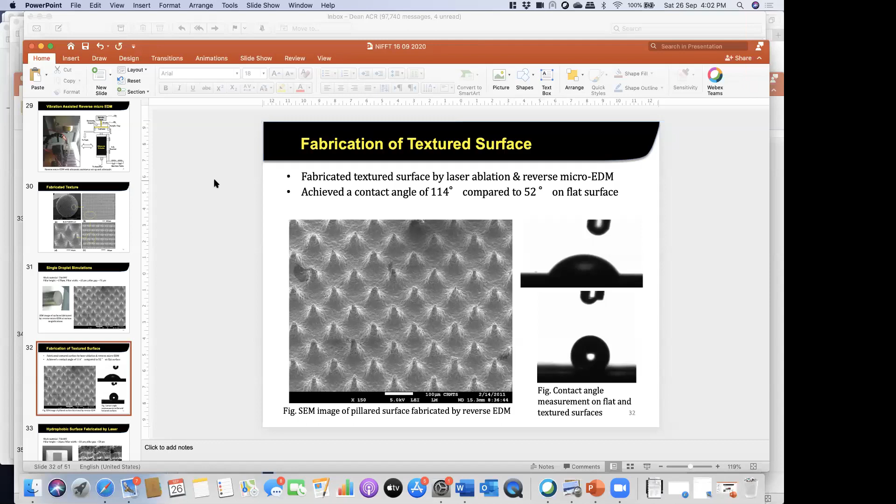There is another question: do the dimple and debris create any micro defects in the material?

So naturally, when you texture surfaces, we have to bear in mind that you are also doing a machining process. But when you use a non-contact kind of process, the chances of damaging the surface are less. Mechanical damage is less because there is no contact between the surfaces. But in that case, thermal damage is always possible, because thermal damage is caused by the heat which is generated.

But there also you can change the thermal damage influence by changing the pulse structure. Normally we have a rectangular pulse structure, with energy during on time and no energy in the off time. So the current is high, it goes, and then it becomes zero—it's kind of a rectangular structure.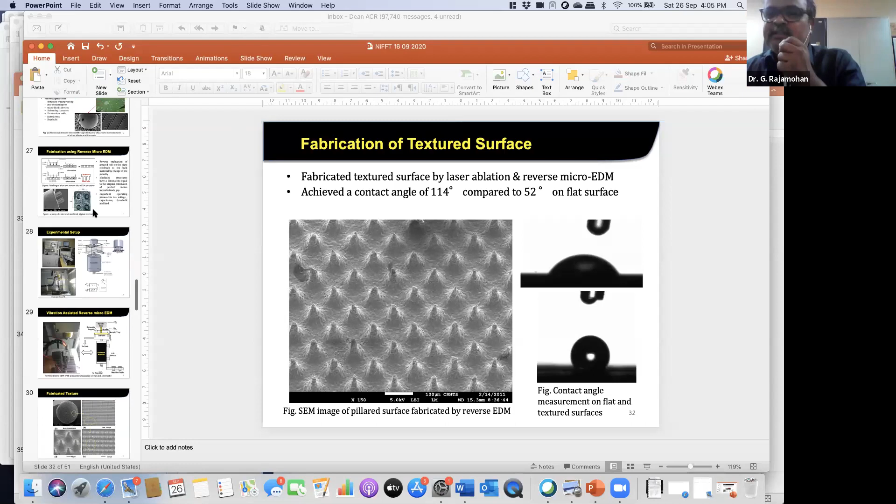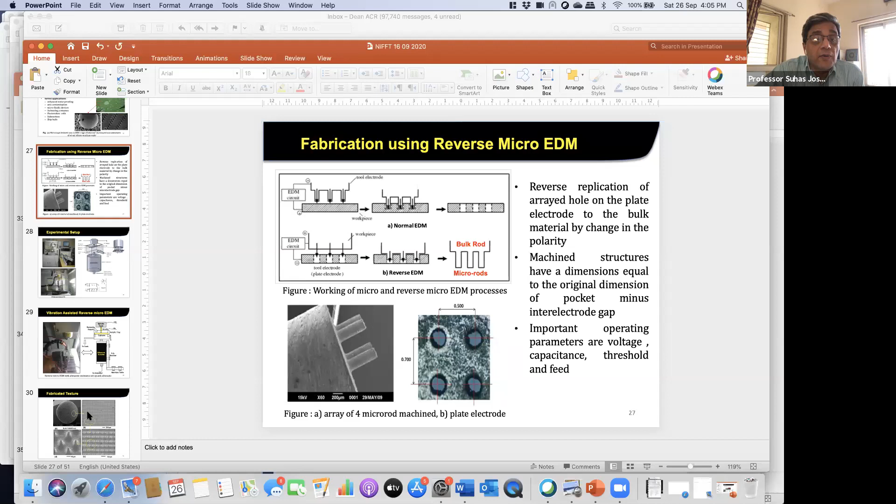Is that okay? Yes, sir. I have another question from my side: you are showing a pattern of holes, and you are doing it in sequence, one after the other. Which pattern of holes are you seeing? You said there were some 70 holes. I think it was sequential.

Sir, can it be done in parallel? Like, can you have a number of holes drilled simultaneously? Will it be possible? So what happens is, if you have a very thin sheet and you try to drill in it, the sheet will bend and you will not be able to drill it. It will be almost like piercing the holes. When a very thin foil of 100 micrometers is there, if you try to drill it, it will actually pierce the hole, it will not drill. So you have to do the EDM operation there, so that there is no mechanical force on it and there is no burr.

Burr will be there, but very minor EDM burrs—almost not there. Whereas once you pierce it, you will find that the uncut material is there on the back side of the hole, and that uncut material is nothing but the burr. So on thin foils, you cannot drill; you have to use EDM.

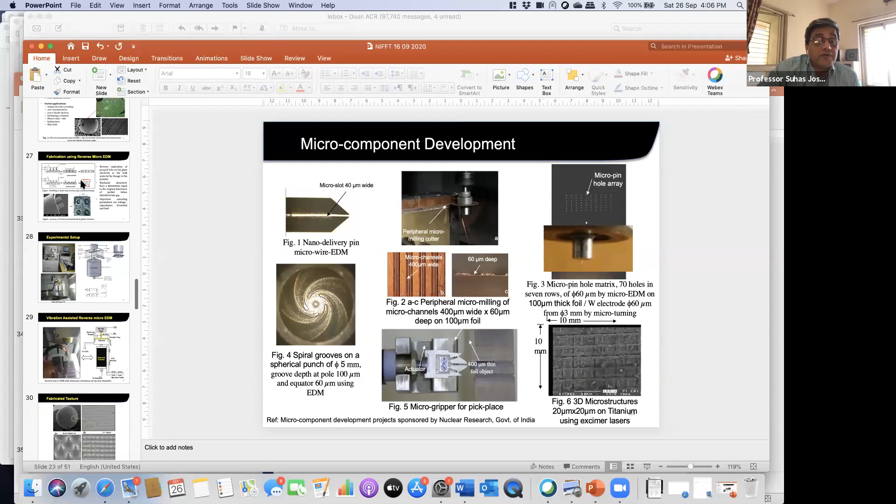You cannot drill it because the sheets will bend and there's no easy way. I'm asking, with EDM, can we have multiple electrodes in one go? Yeah, if you can make multiple electrodes, that's what we try to do—through a reverse EDM, we generate an array of electrodes on the surface, and these can be used for making the holes.

Yes, that is possible. Yes, sir, that is possible. Okay, thank you, sir.

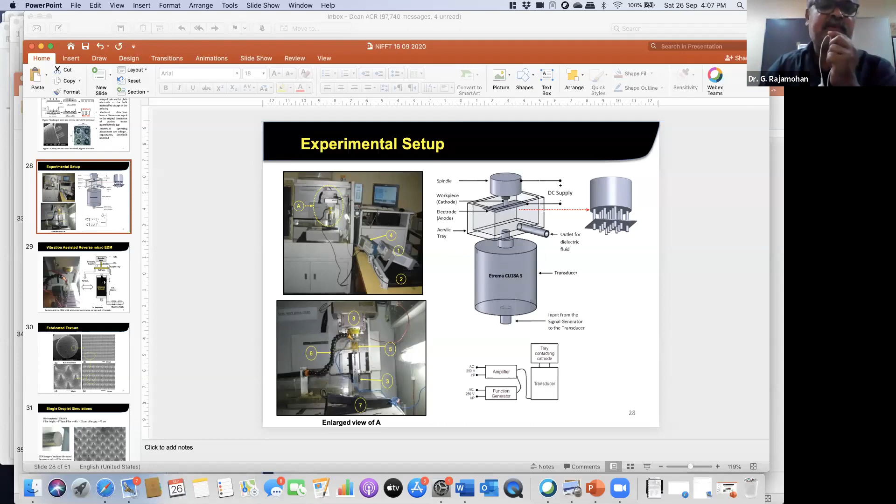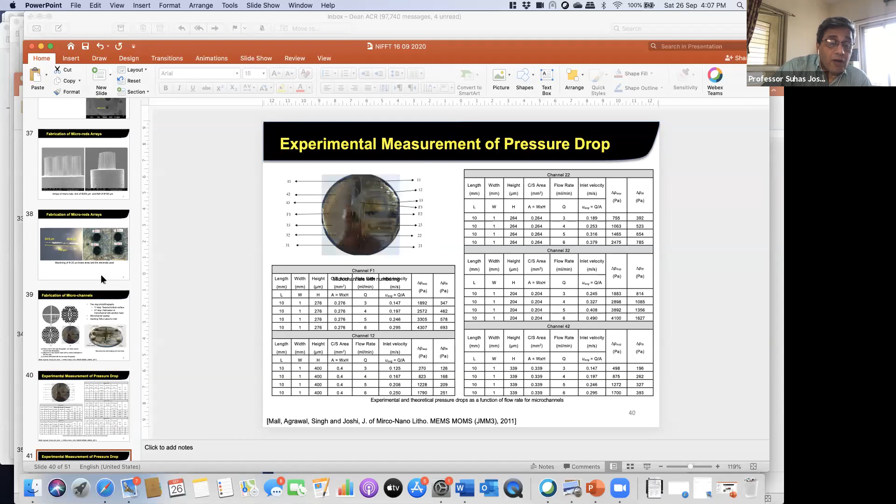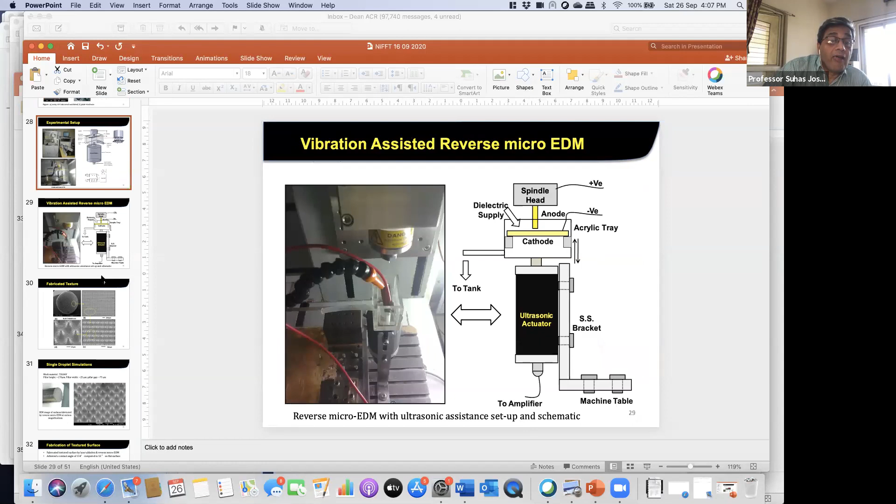There are two more questions, sir. How accurately can we biomimic, since in nature it is not a reductive process? This came from Kumar Satyam. Yes, he's right—we are trying to do something against nature. What he means is that nature has generative processes; it evolves from the bottom up, whereas here we are going top down. So there is a difficulty in these cases.

It's not that there are no generative processes, but with lasers it is now possible that large scale surfaces can be textured, as shown in the last few slides—you can scan, and the second scan can be half the diameter, and the next very close by. By doing that large scale scanning, you can cover entire large surfaces and do the texturing. So the reductive processes are tedious, but with lasers they are becoming easier, and you can spread them over longer surface areas. That is one advantage with these kinds of processes.

Thank you, sir. There is one more, I think, last question. Can this pillar use a micro tool for ultrasonic machining for generating micro patterns in ceramic materials?